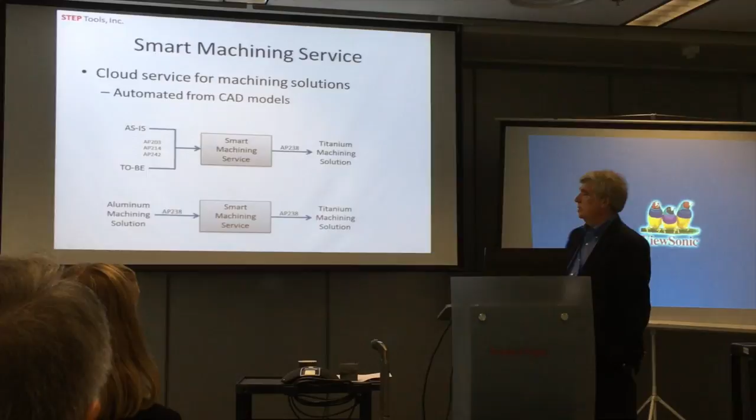So that's one of our services, a service that we developed under the DMDI research program called Mind the Gap, for generating new solutions from existing solutions.

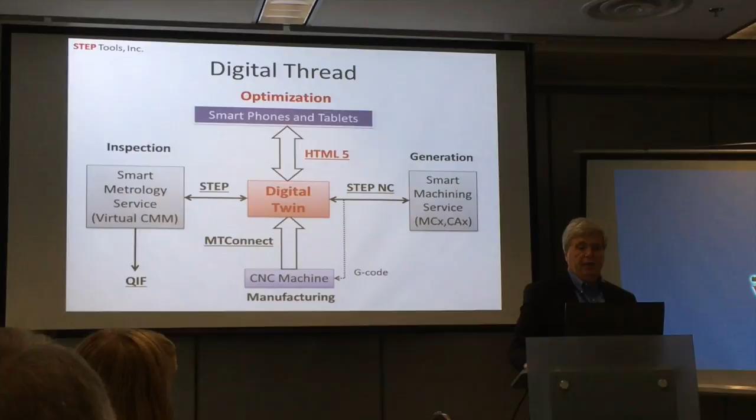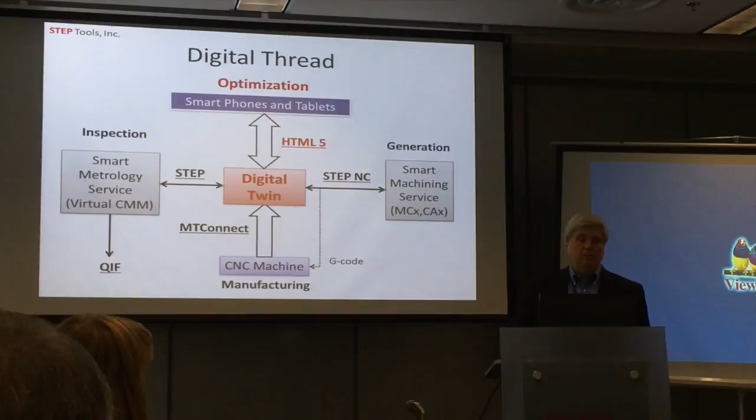The second feature of the twin environment we put together, I want to talk a bit more in detail about, is the scientific optimization of the processes. As we were previously seeing, with a real-time model updated, we can understand what's going on in the machine in more detail than was previously possible.

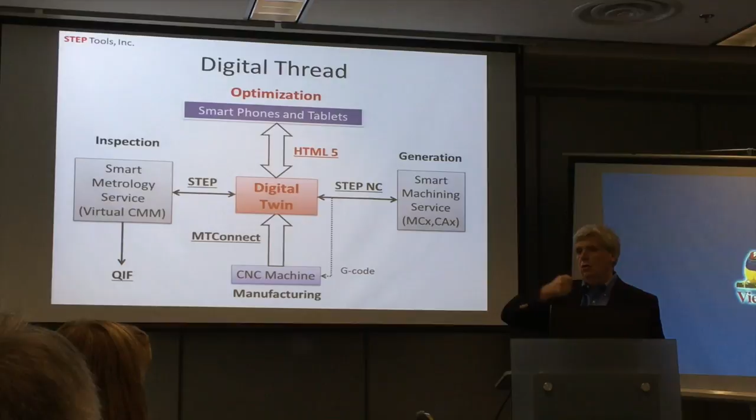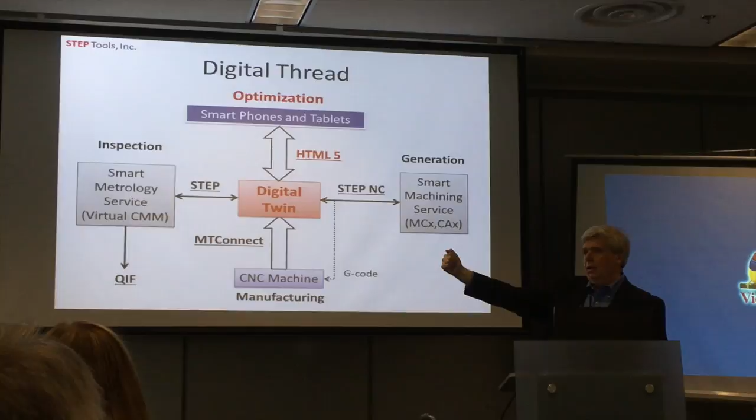If you only have a G code, all you know is you're going to go from 000 to 111 at a certain speed. You've no idea what you're going to do along the way. But if you have a real-time model, you can detect how much material you're going to be removing during that movement, and therefore compute the ideal speed given the current conditions.

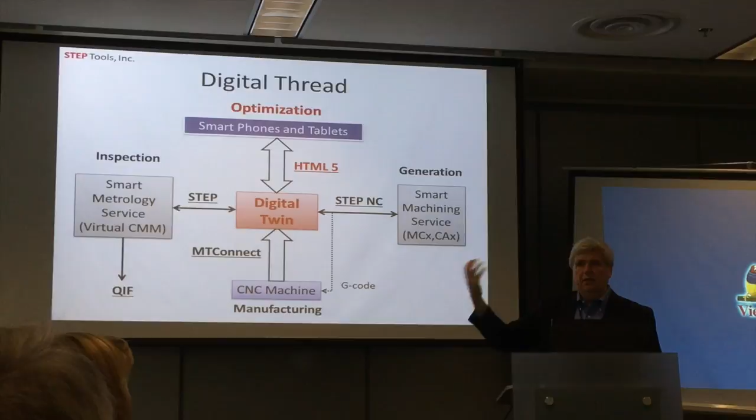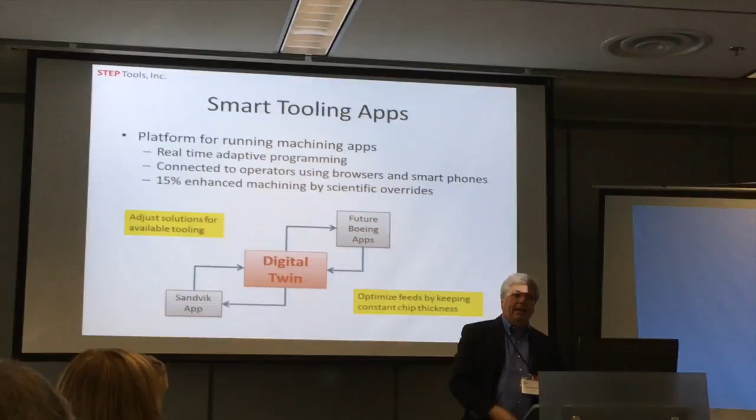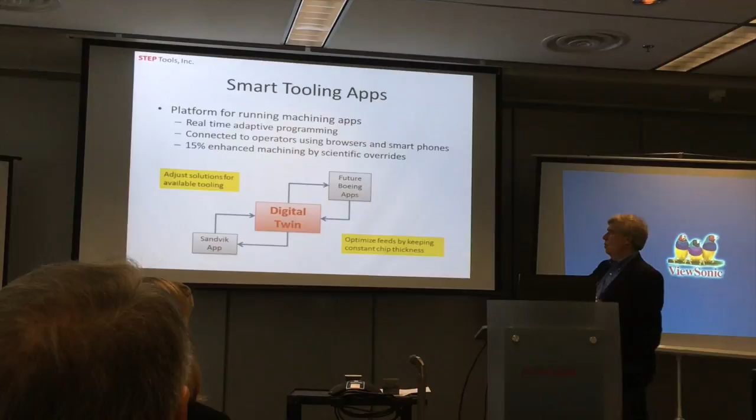So the digital twin becomes an environment for writing apps. I can develop an app for that. This app takes the information computed for the machining program and your various policies and decisions, what tolerances are there, when you think it's a good idea to change things, when it should be locked down, what the material is, and what the vendor recommendation is, and can come up with adjustments.

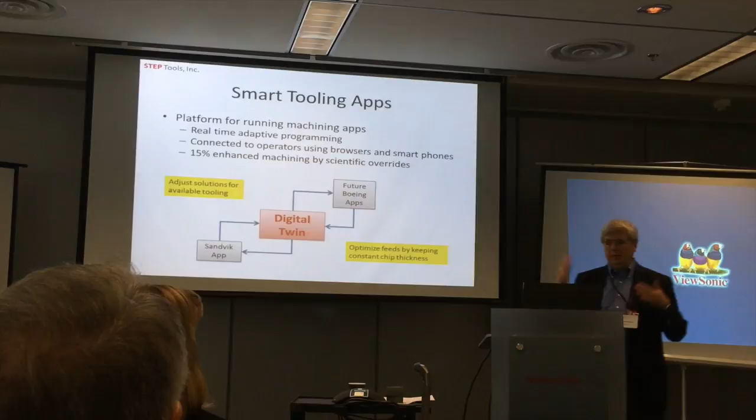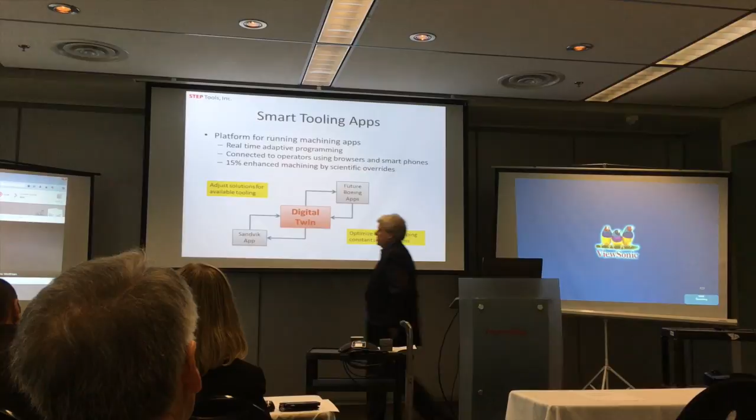And there are different kinds of adjustments. There is the one I'm talking about with going faster, but there's also adjustments because the stock is bigger. The stock may have an additional 3 millimeters on it, for example. If you know that that particular depth at the top is bigger, maybe you can still do the machining, but you need to make an adjustment.

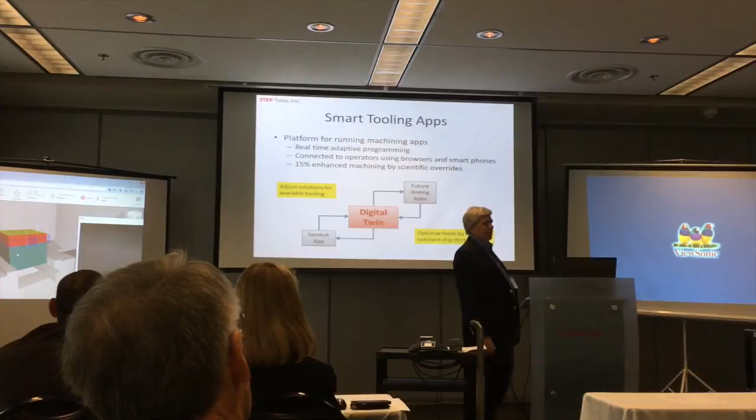And it could be an app for that as well. So this is connected to the operator via the smartphone. It enables the adaptive programming, and it has some quite dramatic results, as we will talk about in a moment.

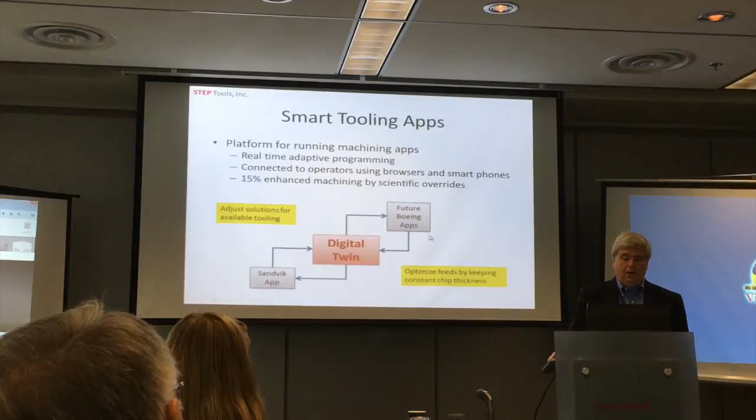We have two experts on optimization in the room. At the back there's Leon Zhu, who is the Boeing expert. He's so good that we're not allowed to even look at what he's got.

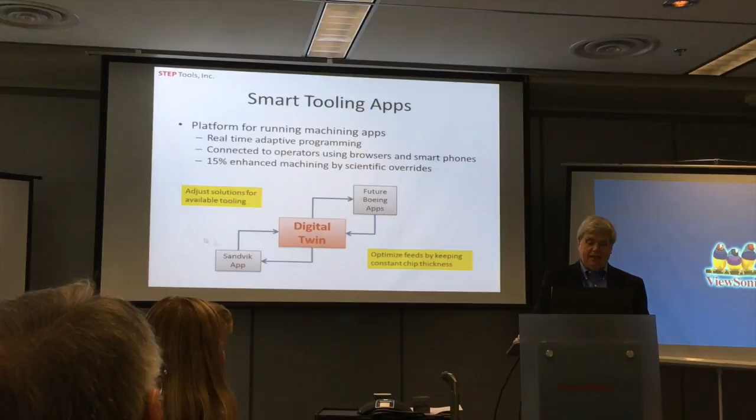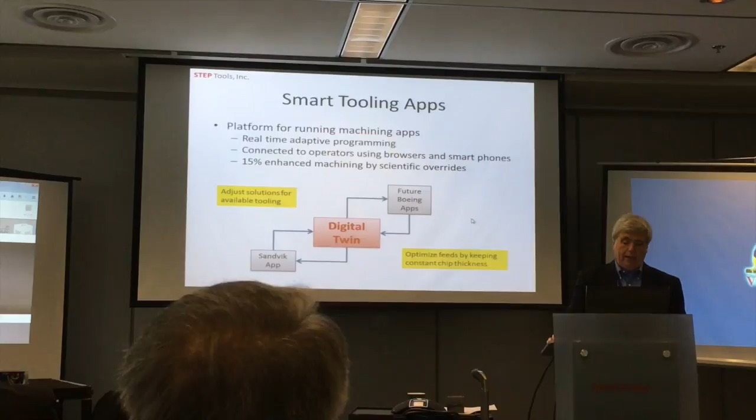But Sandvik is one of the world's biggest vendors of cutting tools. They too know an awful lot about how to use their cutters most efficiently. So I'd like to welcome Bengt Olsen, who will talk about the principles behind this kind of science.

Thank you. So I'm Bengt Olsen from Sandvik Coromant, and I'm also part of the working group 15, Digital Manufacturing, and has been that for a long time before we had that name.

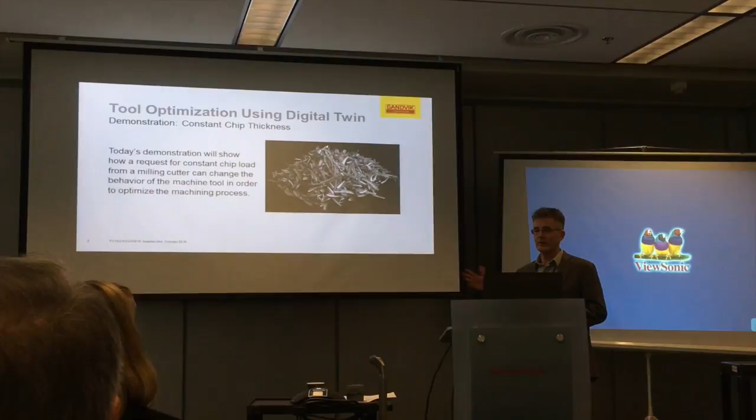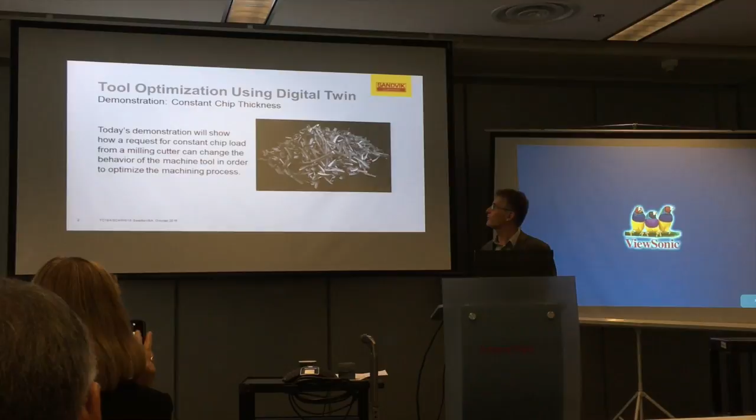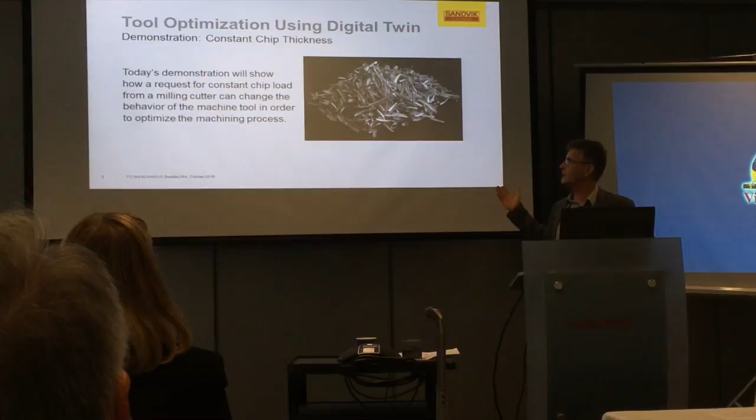And I'm just going to show the principles for what's included in the demonstration today that we have seen. And we concentrate on the chip generated, and since I'm from a cutting tool company, concentrate on what's happening with the cutting tool. And today's demonstration that we saw shows how a request from our cutting tool to run at constant chip load can change the behavior, or it's requesting the change of the behavior of the machine tool that's driving the process.

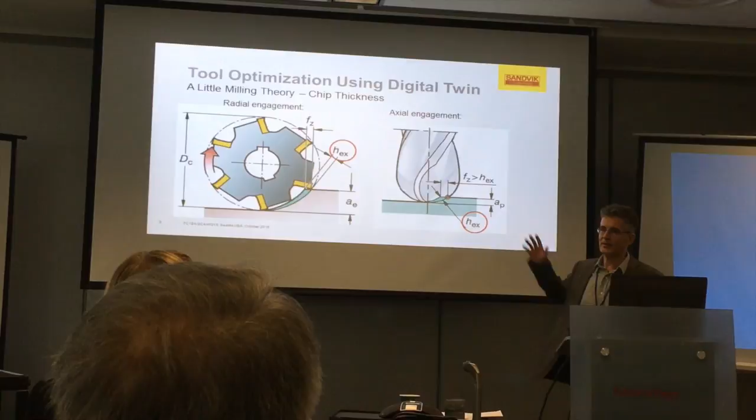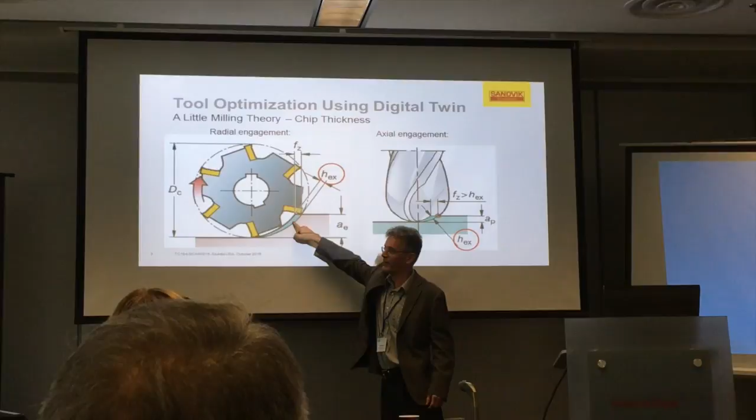And I will show some quick theory. I'm not going to do a full explanation about milling. But chip thickness, even if we drive the tool with a constant feed rate, depending on how much the tool is engaged, in this case it's a radial engagement, the chip will become thinner the smaller engagement is. The same thing happens if you machine at a smaller depth of cut, where on the radius the chip will also become thinner.

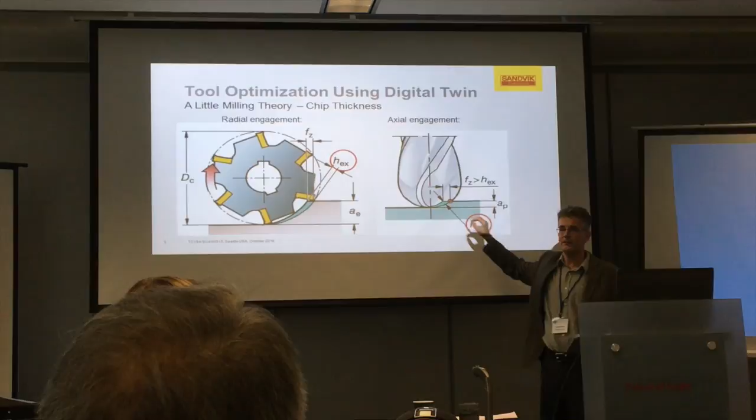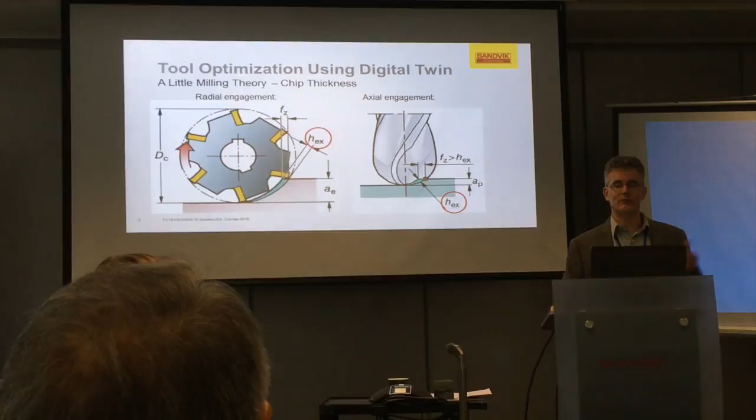These effects are included in this demonstration, in this logic. And it's Leon Zhu and myself that have developed this little black box, since we cannot show everything we know. Those are our company secrets.

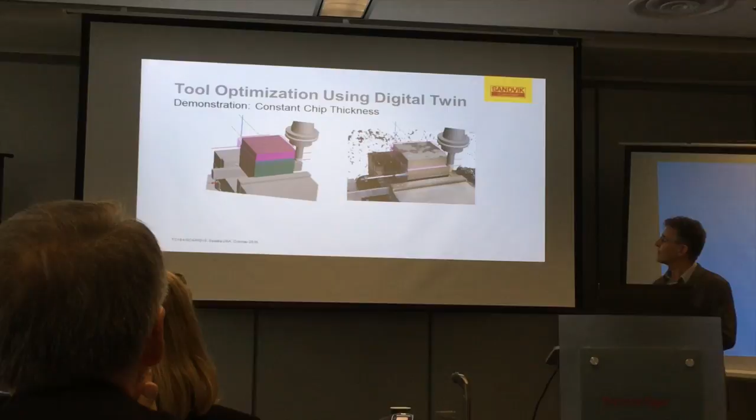So how did we do this? We have the real process that we have seen on the video there. We developed, or Martin has developed the digital twin. And they exist at the same time, real time.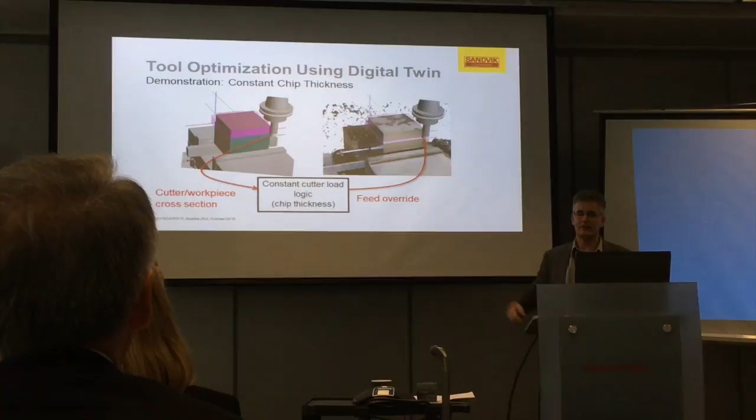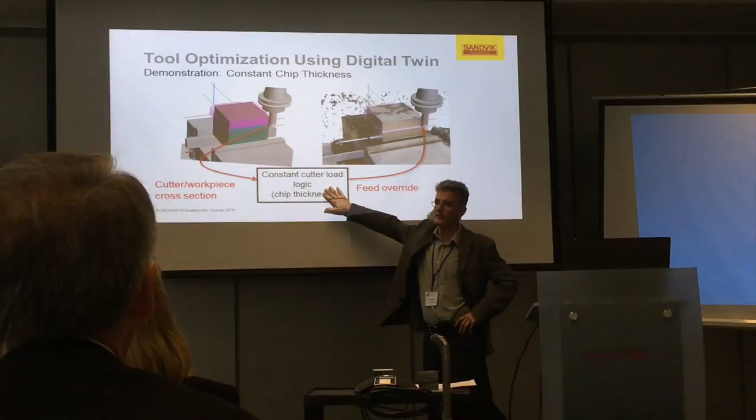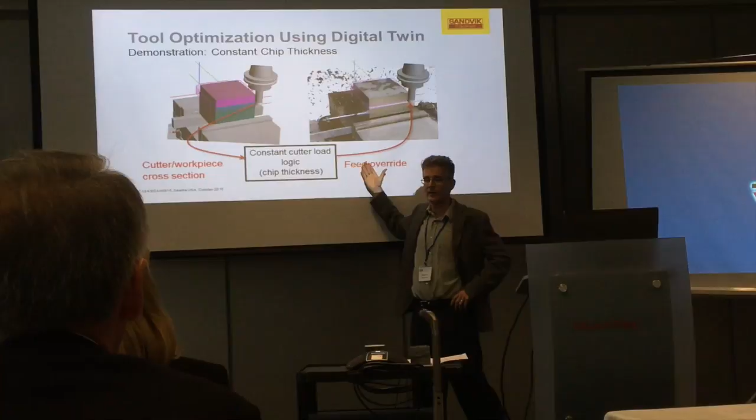So what we do, we get information from this digital twin about the cutter and workpiece cross-section information. And our logic here is figuring out the chip thickness and requesting a feed override to the machine. So if the chip thickness is predicted to be smaller, it will increase override. So this is the idea behind it.

So very simple. Okay.

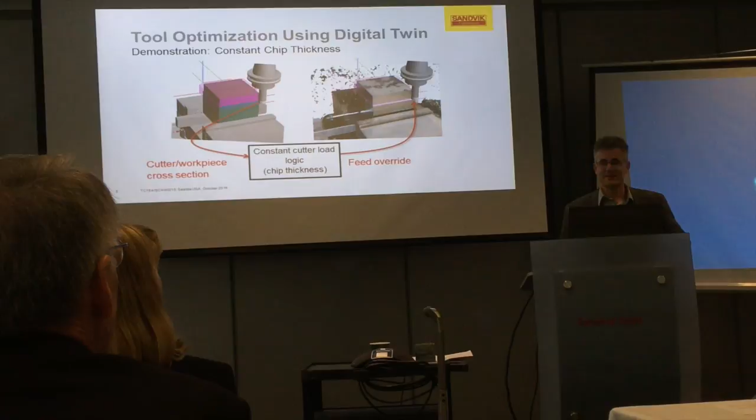And I can also say one thing. Now we have to deliver. I mean, in the past we have to deliver the tool to the customer. Now we have to deliver the tool 2 times. Okay, so you can charge twice as much for it. Of course.

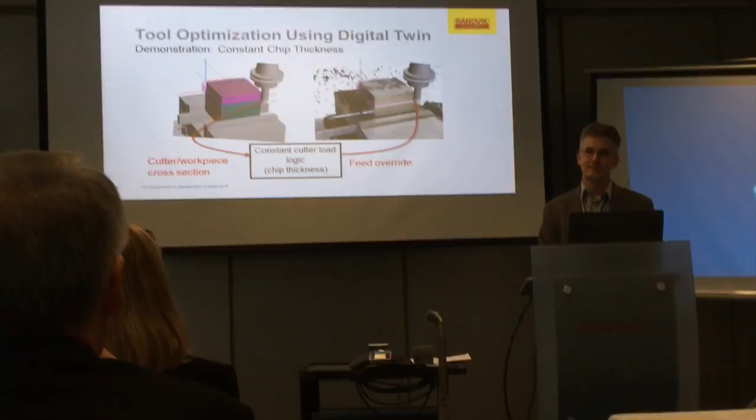So can you share about that? Are you going to share about how you have to deliver the tool 2 times, right? The digital. Do you want to talk about that?

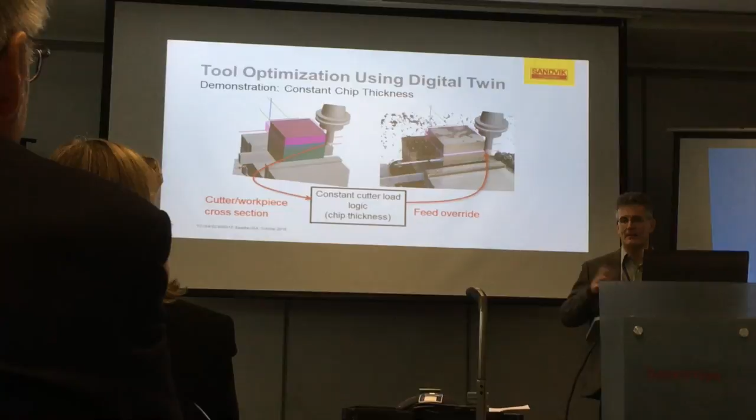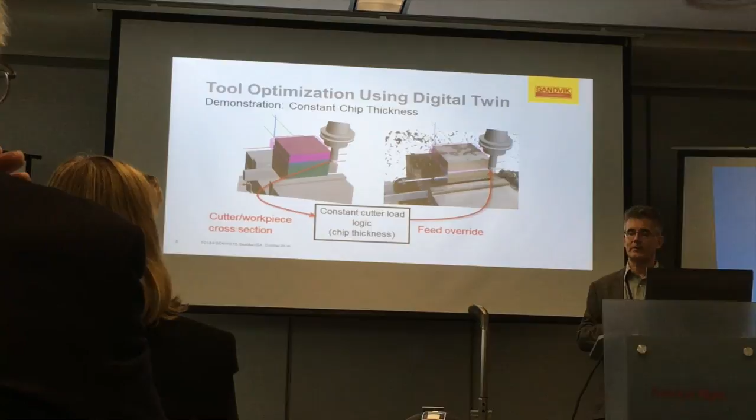I can do that. Today we have about 80% of our tools. We can receive them as a digital package with 3D models and also the parameters. Parameters specification comes in an ISO 13399, the cutting tool standard. And the 3D models are today AP203 or 214. Tomorrow maybe everything will be 242.

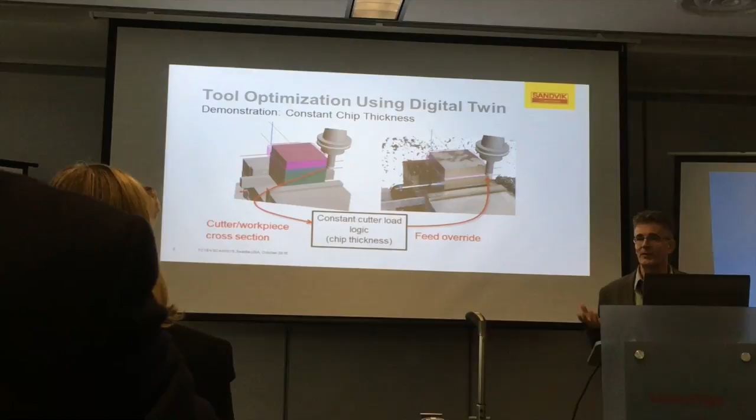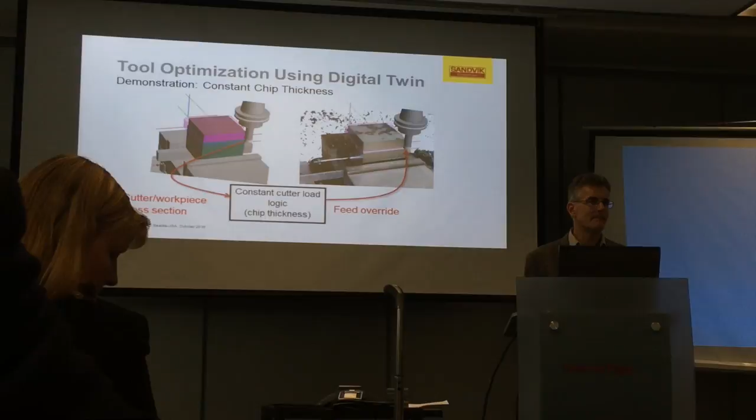Yes, this is Noah's question: what would cause the cut part to vary from the plan for machining such that you could adjust the process?

It's whatever happens before—the tool before, or the raw piece. That was the case in this demonstration; each part had different heights.

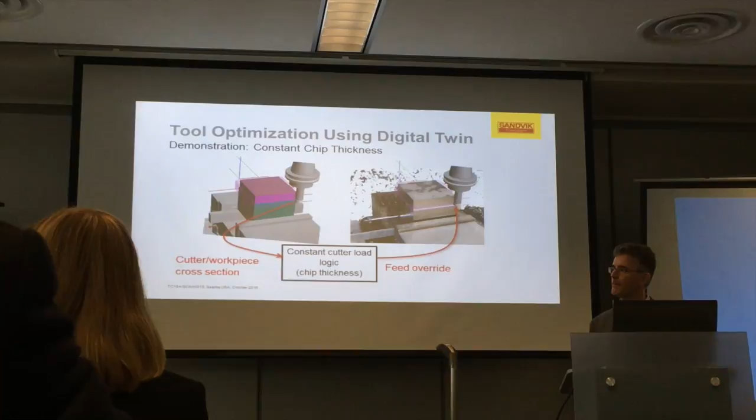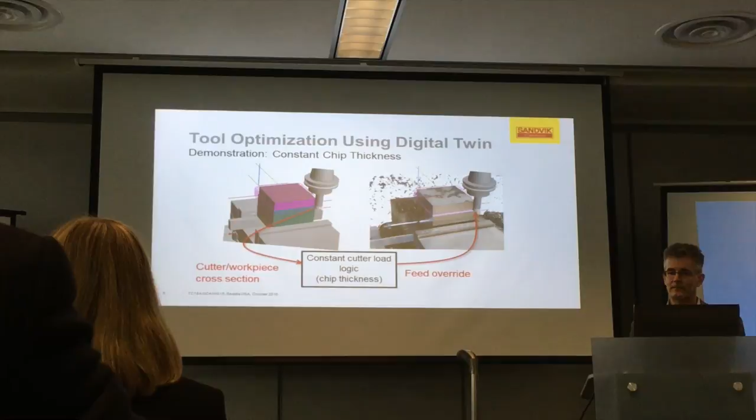Let me bring up a car driving analogy. Supposing I have to drive from here to Portland. If I've got to get there urgently, I'm going to put the pedal to the metal and do everything within the legal limits, which is the tolerances. On the other hand, if I don't have to be there until late tonight, I want to save gas and save wear and tear on my engine, so I drive gently.

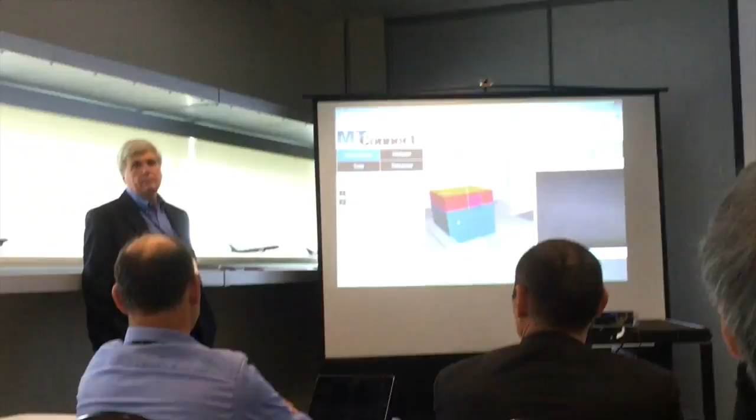So there's a plan, a program for the speeds and feeds and cutting tool paths before you start. And that assumes a particular speed—it assumes you're always going to go to Portland at 60 miles an hour, no matter what.

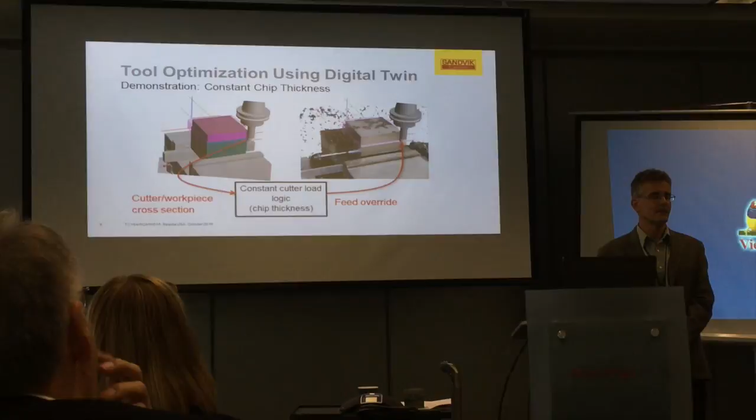This is taking feedback of where you actually are. This is saying it's urgent, so I'm going to go at 70. Or, I've got lots of time, so I'm going to go at 30. What would cause where you actually are to be different from where you expect?

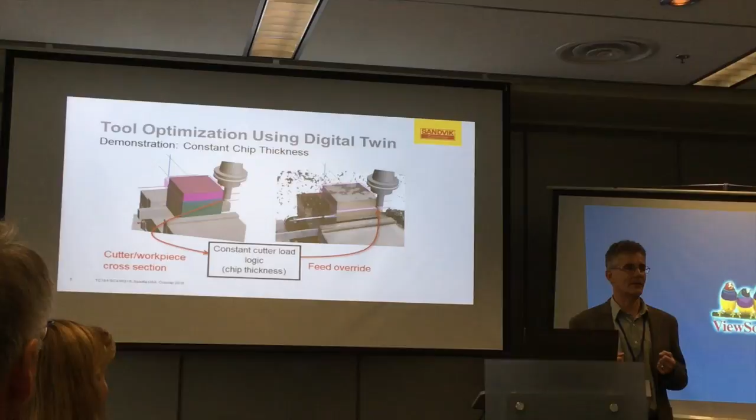What could happen is that you used another tool to machine the surface before, and then my tool will say, I still want to have the same bite into the material. Therefore it would tell the machine, you need to run at 150% now, or slow down to 50%.

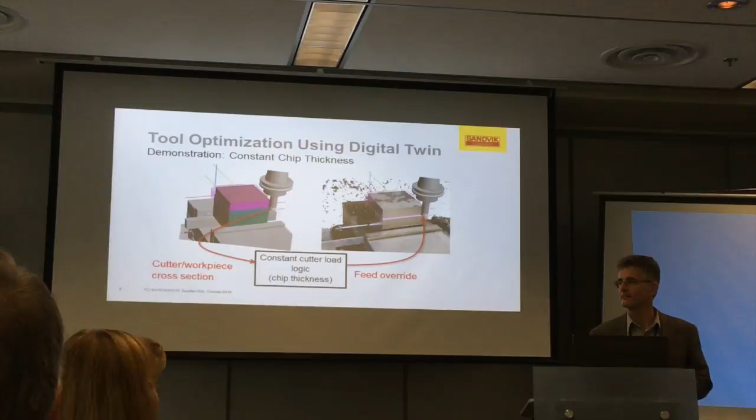And what happens is just stuff happens. Suddenly your part, which wasn't urgent, is urgent because something else broke down.

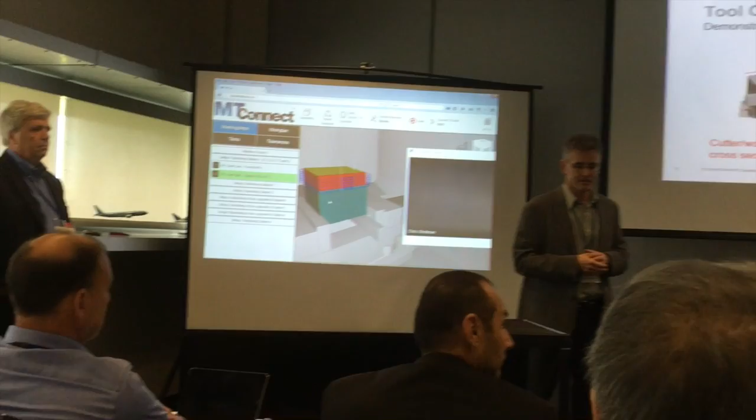Are you actually monitoring the spindle load to determine what the cutter load is, the chip thickness? We're not using that data today, but we certainly can. That can verify that everything is correct.

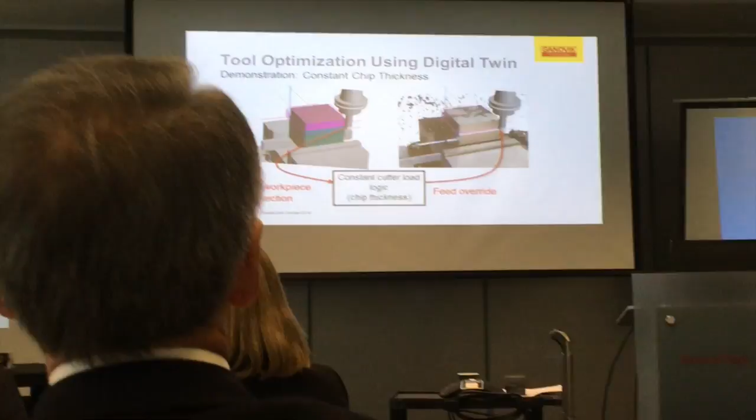Sometimes what we see too in machining is that we'll have a forging, and that forging will be approximately correct. So one thing I would think you could do with this is model the actual forging that was on the machine—probe the forging and then gather your cutter engagement based on the actual stock that's on the part.

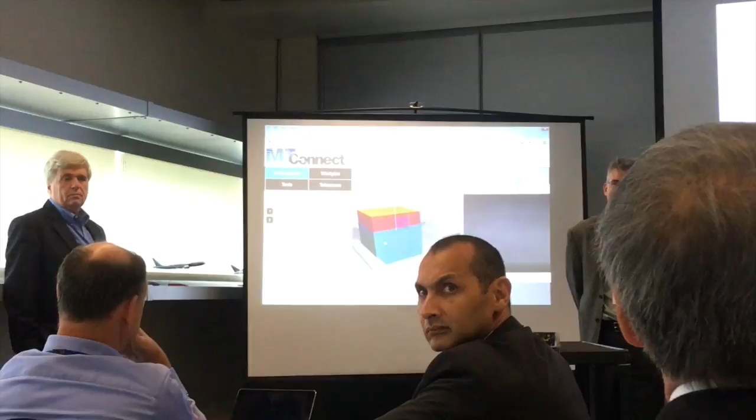The other thing is that when Boeing buys aluminum from suppliers, we pay them by the pound. We give them a tolerance saying this could be between 1 inch and 1.1 inch thick, and we pay them by the pound. So you can bet that our stock is frequently on the thick side.

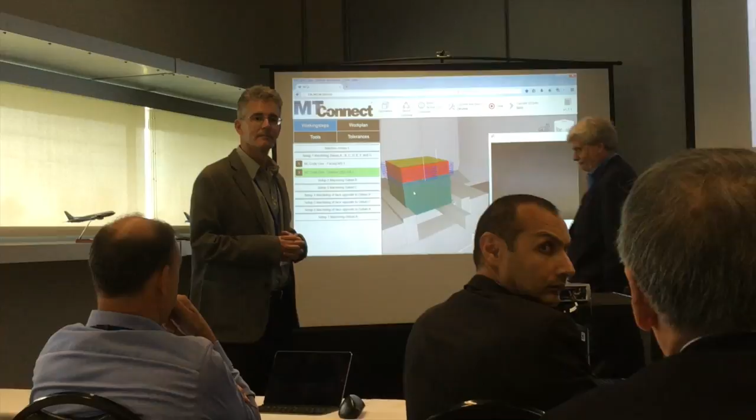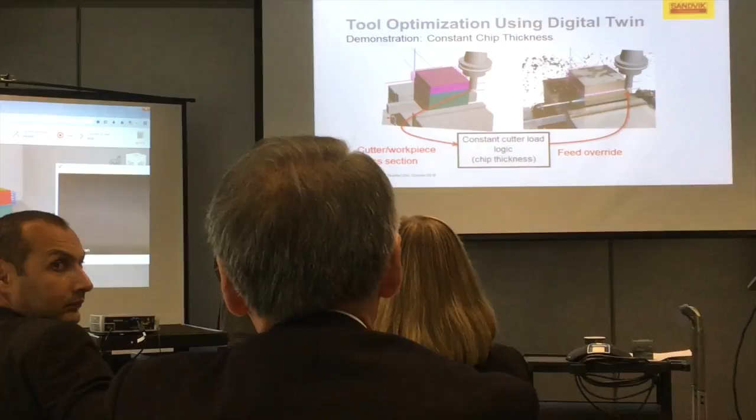Question: is real-time measurement of removal amount included in your system? In order to guarantee stable machining, you should know the removal amount. No, we don't do that in real time in this demonstration, but the information is there to calculate that.

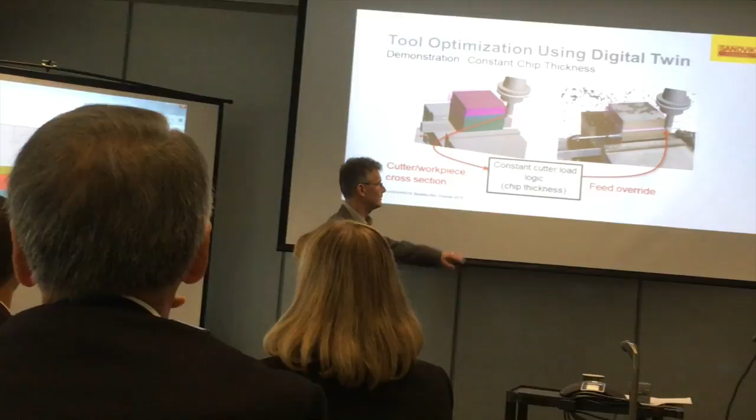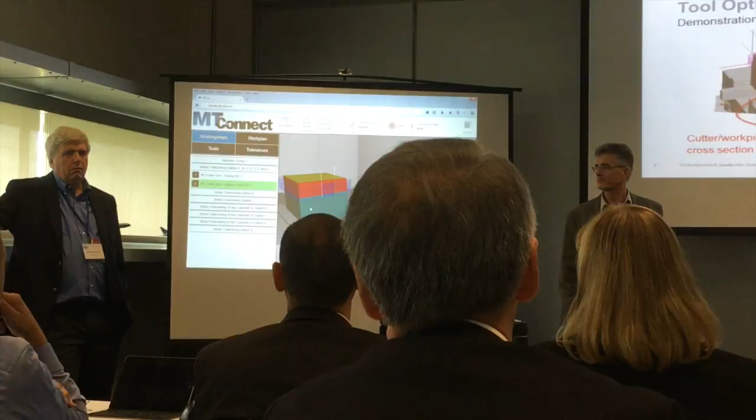Yes, we are calculating it—you have the area. We are computing the real-time volume. We have the cross section between the cutter and the material, and we have the feed.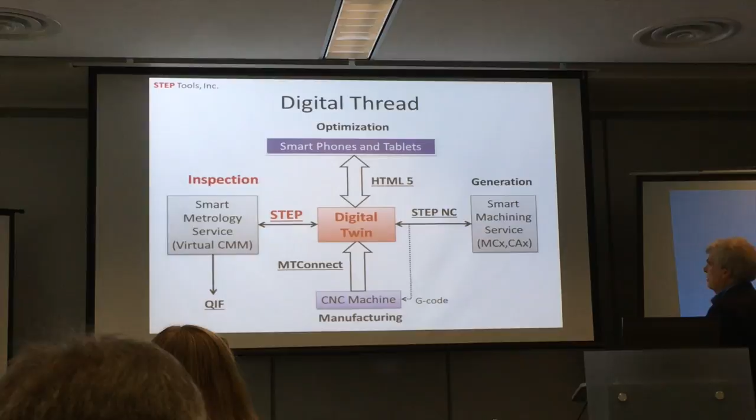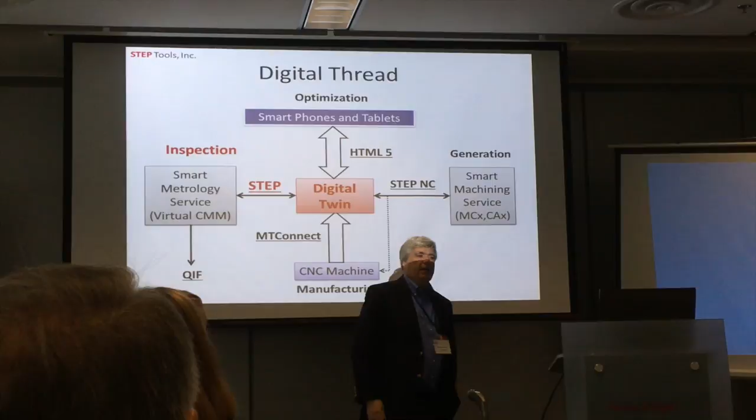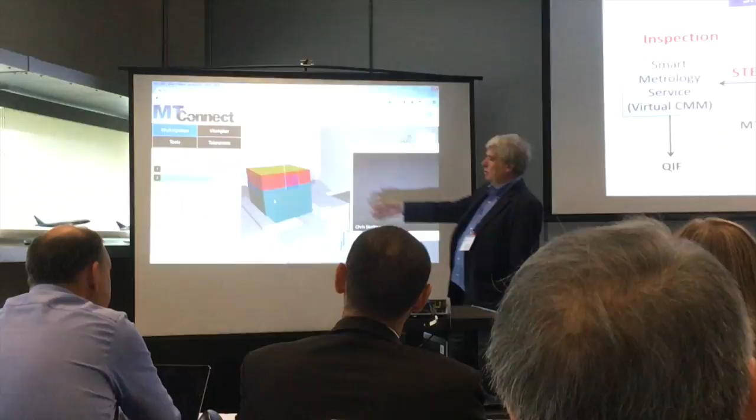So the last thread of our demonstration is that it's good being able to make all these changes—the big changes to get a much better process, the smaller changes to adjust to the current schedule, the actual stock, etc. But while you're doing all these things, you've still got to make something the customer can use. A key thing about the digital twin technology is that we are making a real-time model of what's being machined, and therefore we can measure that model.

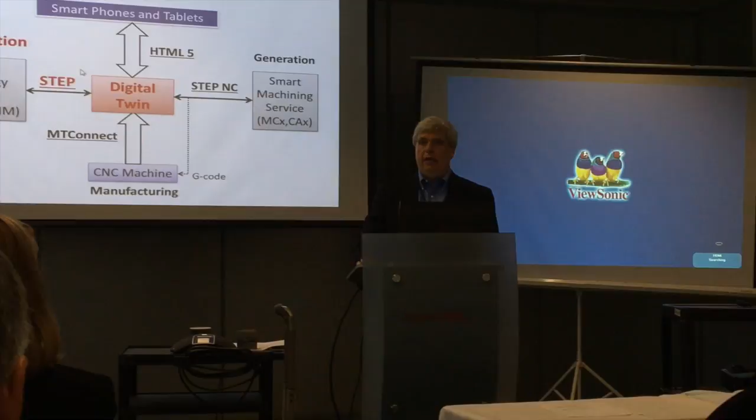We measure that by exporting STEP from the digital twin, STEP AP242, to a metrology service. We're going to be showing two forms of metrology today. Traditional metrology is done on a CMM machine, and we have one in the basement.

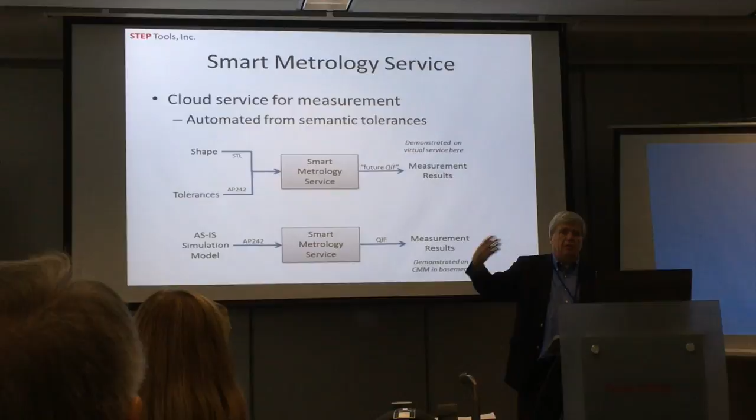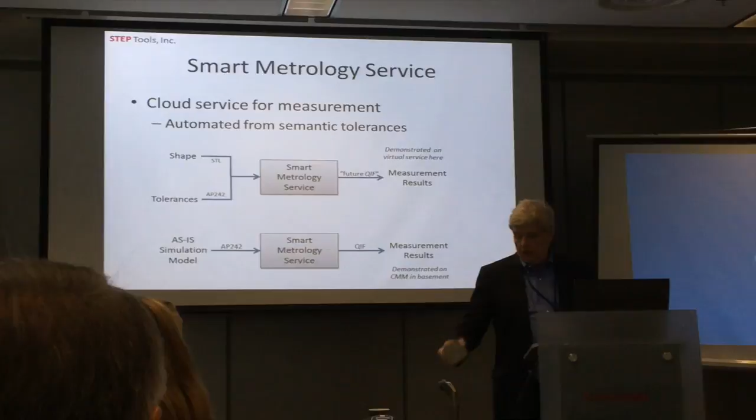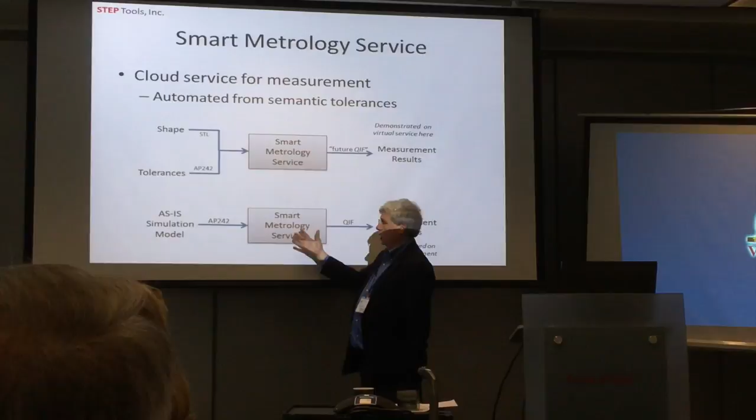As soon as we've finished upstairs, we're going to go downstairs to that basement and watch the machine measure the physical part, a copy of this one, and we'll see the automated construction of a measurement plan for checking the tolerances as described on the part in AP242.

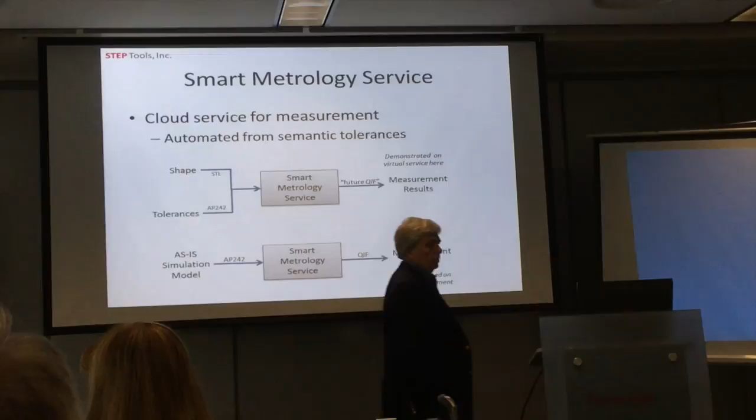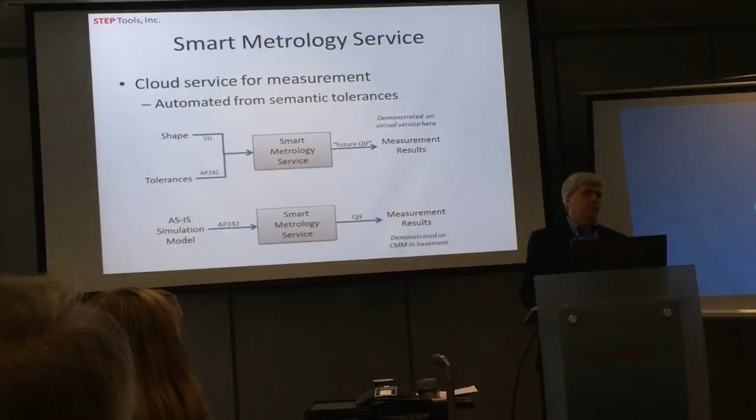More futuristically, upstairs we're going to take a look at supposing I did the measurements in real time—supposing what I just showed during the machining, the development of a snapshot of the current state of the model, sending that into metrology software so it can evaluate those results and let me know if I'm going to meet my tolerances or not.

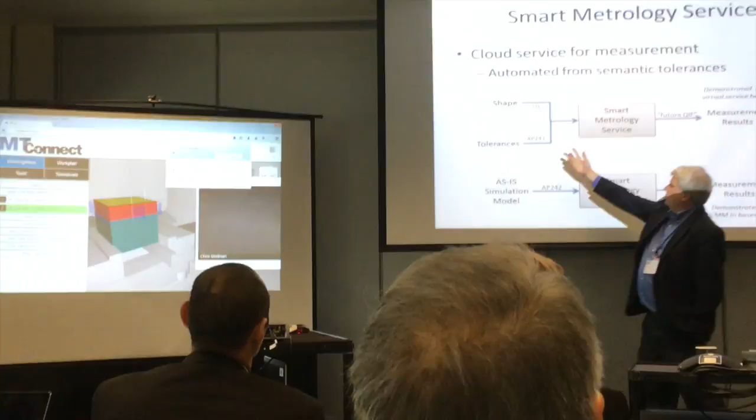Eventually this may lead us into what's called closing the loop: machining, measuring, adjusting, machining, and measuring. For the moment, we'll just take a look at the requirements in 242, the results as STL, and a basic comparison to produce a model of the difference.